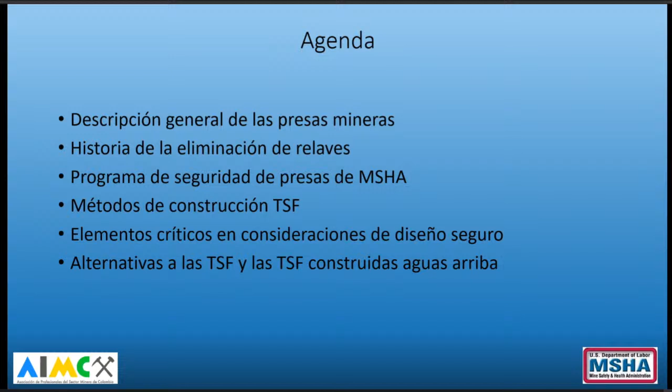How are dams used at mining operations? ¿Cómo son nuestras presas utilizadas en operaciones mineras? The primary purposes are for the disposal of waste from mining and processing. El principal aspecto importante es la eliminación de los desechos de operaciones mineras y de su procesamiento. The storage or processing of plant water. También es muy importante el tener la consideración respectiva con el almacenamiento y el procesamiento de agua en las colas. Sedimentation control and flood control. Control de sedimentación y control de inundaciones.

Next. The primary differences between a conventional water storage dam and a tailings dam.

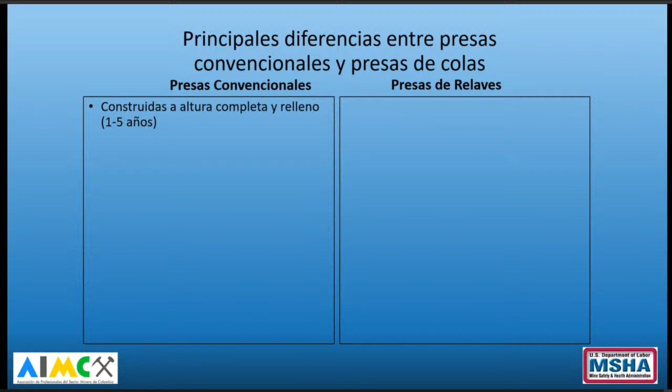Las principales diferencias entre las presas convencionales y las presas de colas son: a conventional dam is constructed to its full height and filled typically within 1 to 5 years. Las presas convencionales son construidas a su altura completa y son rellenadas en un lapso de entre 1 a 5 años.

A conventional dam is constructed of select materials chosen for specific properties. Las presas convencionales son construidas a partir de materiales selectos elegidos de acuerdo a sus propiedades específicas. A conventional dam will use less risky construction methods. Una presa convencional va a utilizar métodos de construcción menos riesgosos.

The design and operation of the dam rarely changes during the life of the dam. Su diseño y operación rara vez cambia durante la vida de la presa.

A conventional water storage dam is considered an asset. Y las presas convencionales de agua son consideradas un activo.

A conventional dam is breached at the end of its useful life. Y las presas convencionales al final de su vida útil son desmanteladas o se les genera un orificio para que puedan continuar el flujo normal de agua.

Conversely, a tailings dam is constructed incrementally over the life of the mine, which may be 20 or more years. A diferencia de las presas convencionales, las presas de relave son construidas de manera progresiva y a lo largo de la mina, que puede ser más de 20 años.

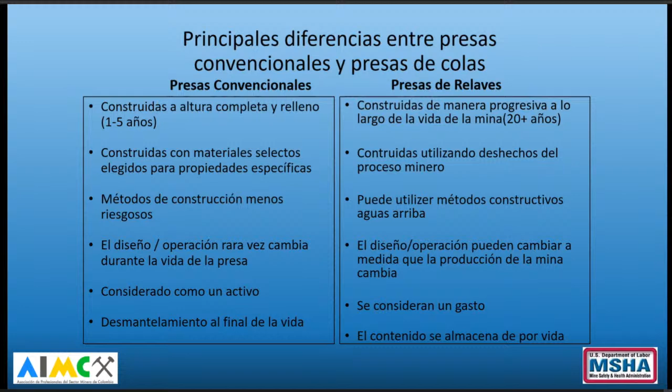The contents of a tailings dam must be stored for eternity, typically. Y el contenido de las presas de relaves tiene que estar almacenado por el resto de la vida, generalmente.

Similarities between a conventional dam and a tailings dam. Como hay diferencias, también hay similitudes y entre estas se destacan.

They are designed for similar conditions for flood routing, stability, and seepage. Son diseñadas para condiciones similares como inundaciones, estabilidad o infiltraciones.

They will be monitored to assess their performance. Son monitoreadas para evaluar el desempeño.

They're inspected regularly to identify deficiencies. Son inspeccionadas de forma regular para identificar deficiencias.

And the consequences of failure are identical. Y las consecuencias de fallas son idénticas.

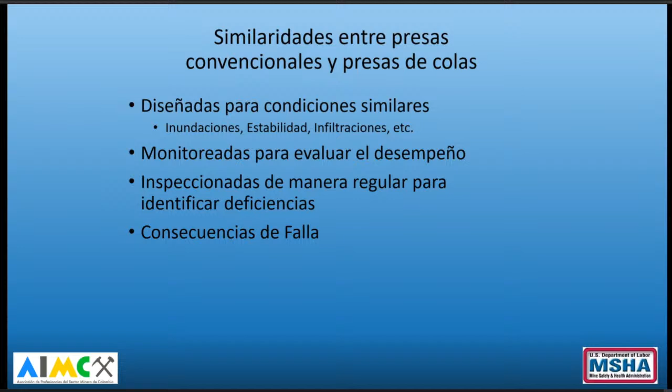A brief history of MSHA regulations related to dam safety. Vamos a hablar ahorita un poco sobre la historia de la reglamentación de MSHA acerca de la seguridad de minas, de presas.

In 1966, our Metal and Non-Metallic Mine Safety Act. En 1966 fue desarrollado este act que ayuda con el tema de metales y no metálicos en minería. It was one simple statement that if failure would create a hazard, it shall be of substantial construction and inspected at regular intervals. Y era muy simple este act y lo que buscaba era que si alguna presa generara un peligro, debería ser construida teniendo en cuenta todos los aspectos técnicos e inspeccionada en intervalos regulares.

In 1969, our Federal Coal Mine Health and Safety Act was passed. Y en 1969 fue pasado en el Congreso el Acta Federal de Seguridad y Salud en Minas de Carbón. Similar wording, except there was a requirement for weekly inspections. Y fue muy parecida a la anterior reglamentación, sino que se le incluyó reportes semanales cuando habrían inspecciones muy pobres.

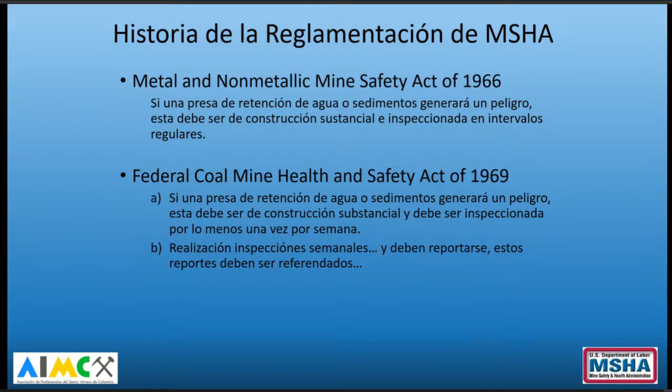Initially, waste would be dumped straight into a river or a stream. Inicialmente, los desechos del carbón eran tirados a los ríos o quebradas. When that was stopped, mine operators would start to build impounding structures. Cuando eso paró, los operadores mineros empezaron a construir lagos.

And they weren't always of good engineering, design, or quality. Y muchas veces no contaban con las características ingenieriles de buena calidad.

In 1972, February, a famous dam failure at Buffalo Creek occurred. Y debido a eso, en 1972, el 26 de febrero de 1972, hubo una falla en la presa de desechos de carbón de Buffalo Creek. The photo on the left shows the pre-failure condition of the embankment. La foto en la izquierda muestra el talud antes de la falla.

And the right shows the aftermath, the post-failure and the destruction. Y en las fotos de la derecha muestran lo que pasó después y la destrucción. Resulting in 125 fatalities and 4,000 homeless. Resultando en más de 125 vidas perdidas y más de 4,000 personas sin hogar.

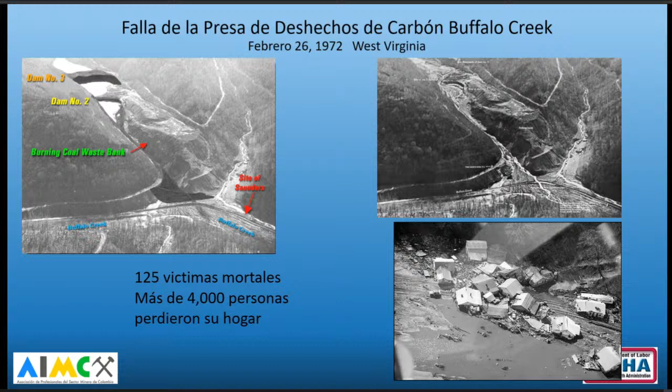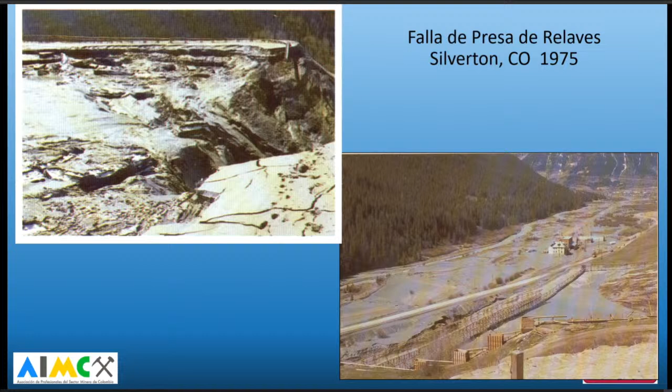A 1990 failure in San Juan, Puerto Rico that covered a toll road - one of the tailings dam failures that year completely covered a toll road.

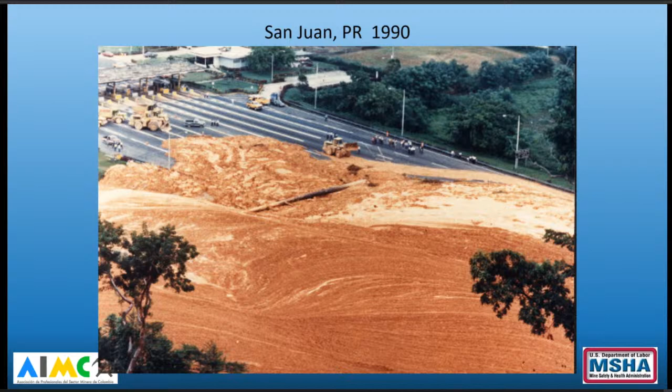Continuing with the history: in 1972, because of dam failures, the U.S. Congress enacted the National Dam Inspection Act. The Army Corps of Engineers would inspect all non-federal dams.

A national inventory of dams was created, and the federal government started to write the federal guidelines for dam safety.

At that time, MESA, which was before MSHA, published guidance on inspection and design of dams for coal mines and metal/non-metal mines.

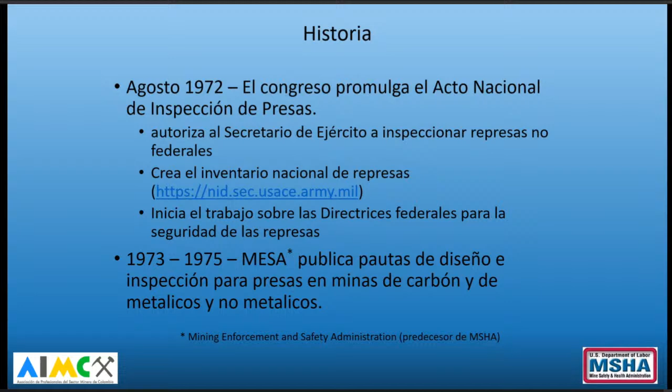In 1975, there was a big change in our coal regulations. We now required a design plan by a professional engineer.

The plans have to be approved by MSHA.

It established criteria for people conducting inspections of the dams.

Hazardous conditions had to be corrected promptly.

And it requires an annual certification by a professional engineer that the dam is constructed according to the design plan, meeting the required standards.

And from 1975 to the present, we continue to publish guidance on the design, operation, and inspection of coal dams.

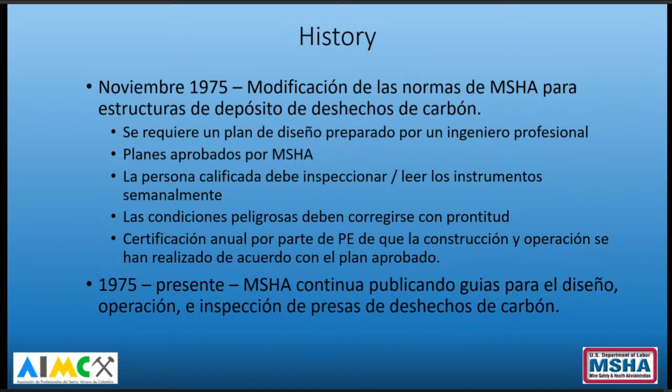In 1975, MSHA published a design manual, and it was updated in 2009.

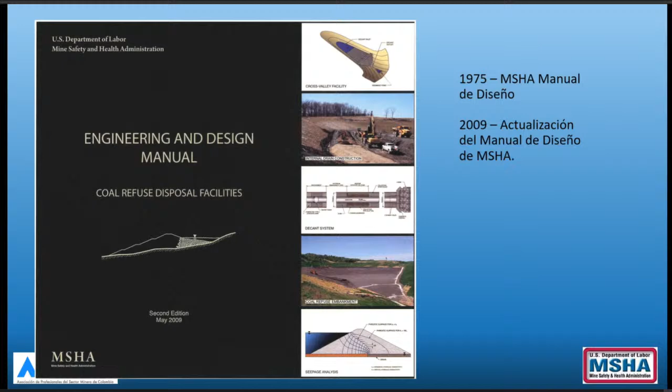These are some examples of the type of construction we see after our regulation was improved, after 1975.

Material is placed according to engineering specifications.

An example of construction of a modern day coal impoundment.

A view of the downstream face of one of our coal impoundments in West Virginia.

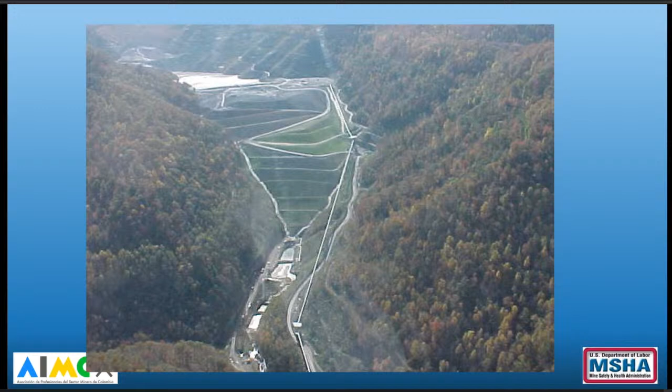On our metal non-metal side, we've tried three times to pass regulations.

But the regulation today remains the same as it was in 1966.

Many of the U.S. states do have regulations for tailings dams.

A couple of pictures of a construction of metal and non-metal dams.

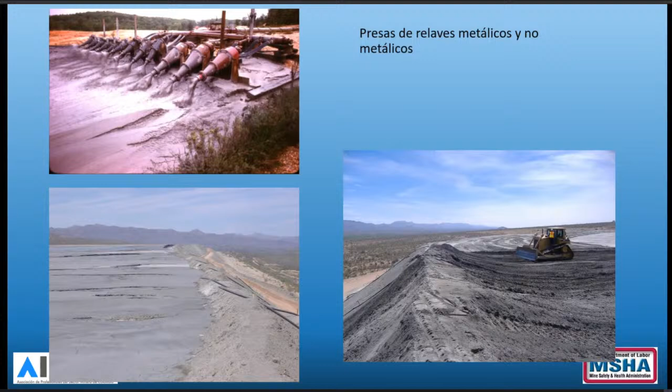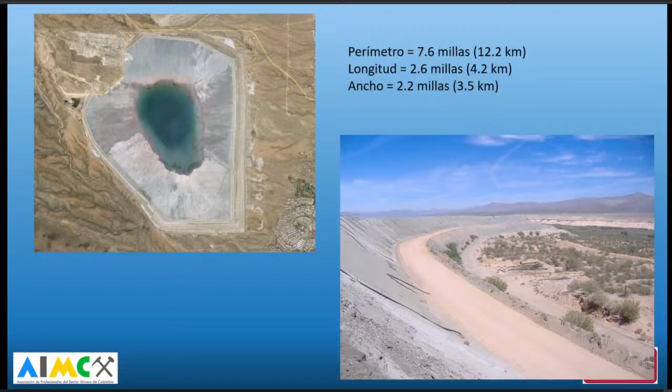The left-hand photo is one of our larger dams in Arizona, and you can see the dimensions.

In January 2021, MSHA published an updated dam inspection and plan review handbook for our inspectors. Information on our dam safety program and references are available on our dam safety webpage.

A summary of our dam safety program.

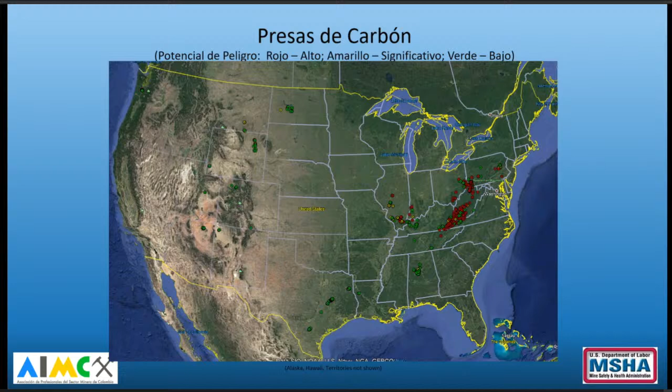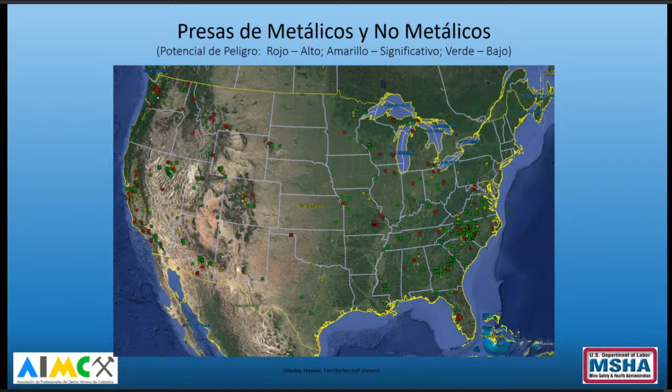Next, I would just like to close by saying a word about the recently published Global Industry Standard on Tailings Management.

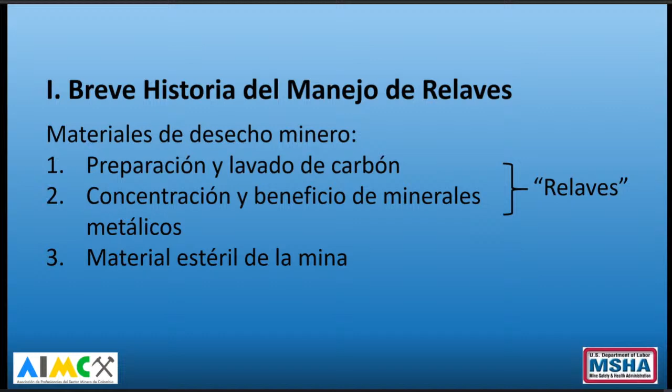In the eastern United States, coal preparation is a very important part of processing coal to remove the impure rock materials from the coal.

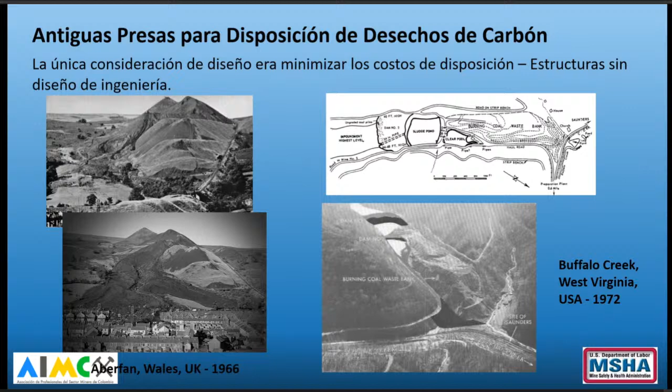Next. Okay, of course, coal.

Coal preparation today is very efficient at removing all the size fractions of coal from the waste.

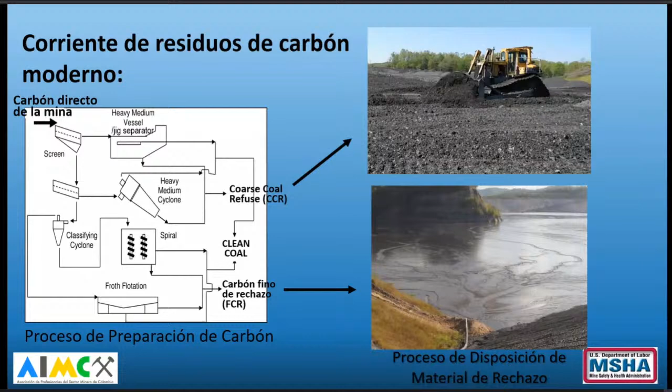Of course, with metals tailings, there was similarly very little engineering to dispose of it. In some cases, no impoundment at all. One case involved disposing tailings directly into Lake Superior in the state of Minnesota. In other cases, they were designed to standards no engineer would design any structure for.

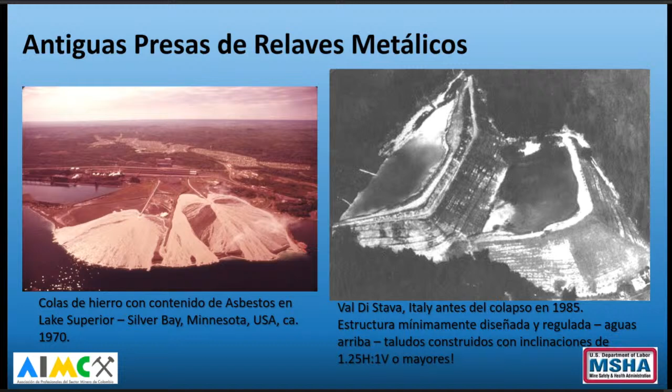Next slide. Stan discussed already the coal and the regulations, and they've been successful.

The slide he showed, this is the Upper Big Branch refuse impoundment. Stan showed an earlier slide, and it's been safely operated.

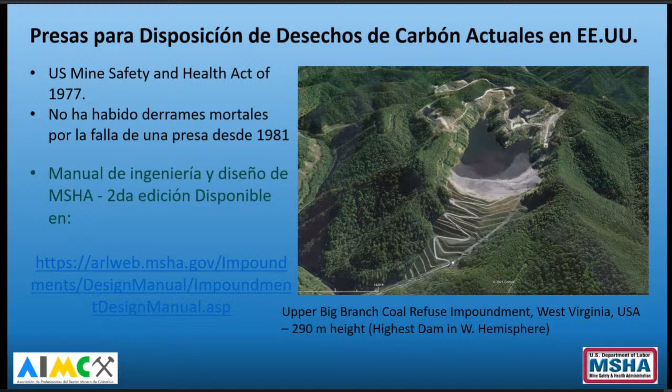Okay, next slide. Stan also discussed, of course, metals impoundments.

The standards around the world vary widely. In the United States, there is very little regulation.

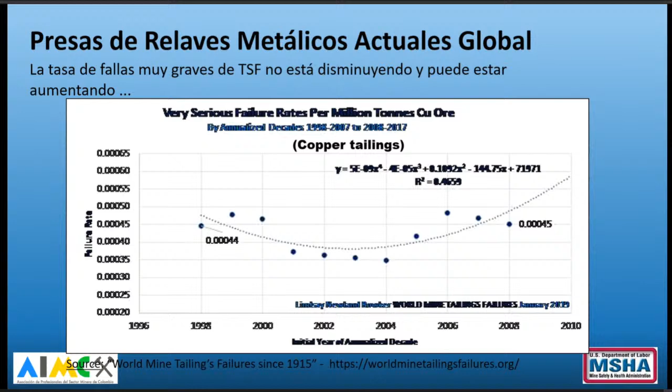Next. Recently, Dr. Williams, who was one of the investigators for the Brumadinho tailings disaster, placed this large red area in this chart of probability of failure and lives lost, indicating very high risks, certainly unacceptable.

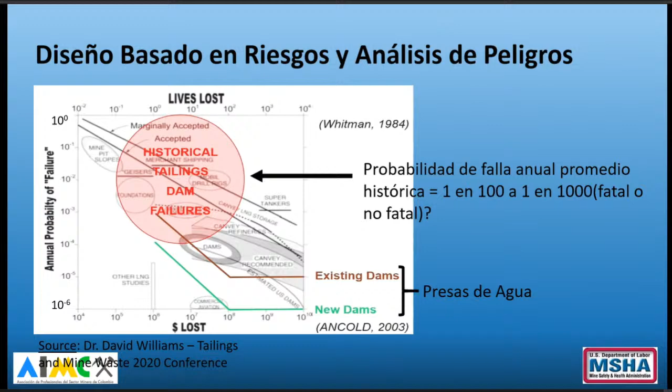Next. In evaluating the risk, it starts with evaluating how much material will be released and how far will the material travel if a failure occurs.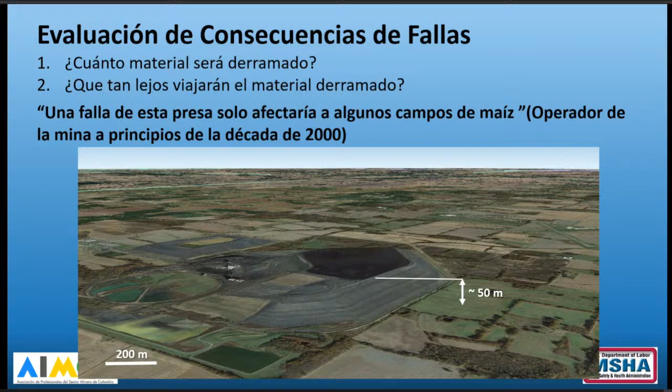Okay, next. This is one example of the quantities released. As you can see, it was approximately 60% released and flowed into actually an adjacent body of water.

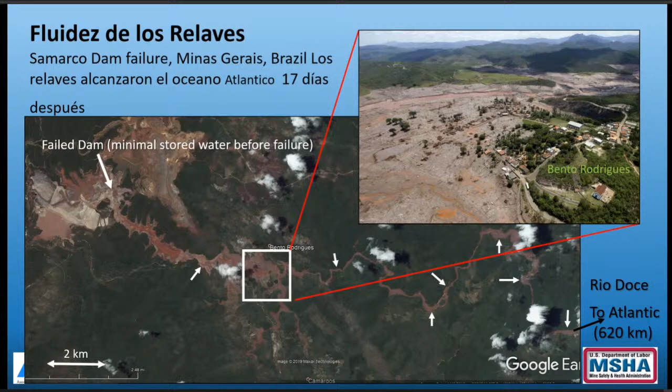Next. So the key point of a hazard analysis is to do a detailed analysis of the dam should it be breached.

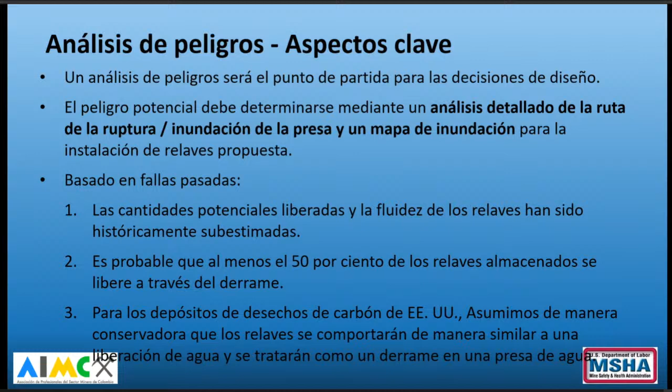Okay, next. This is the classification system. Should be noted, what's generally adopted internationally is 5 different levels of classification of the consequences of failure. In the United States, we use 3. However, basically the highest level is achieved as soon as there's any chance of loss of life.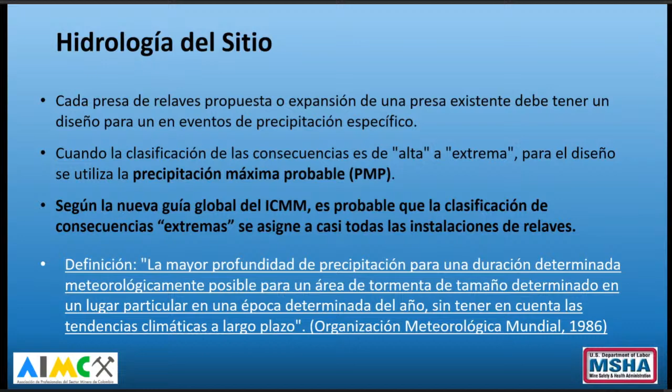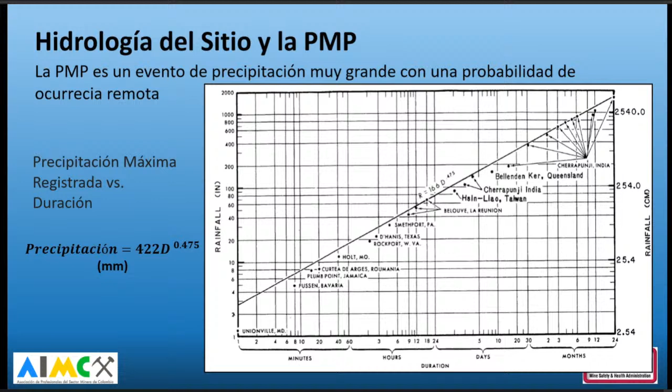The design measures to accommodate the storm will include either providing enough height of the crest above the normal pool to store the storm, or a large enough spillway to pass the storm without storage needed.

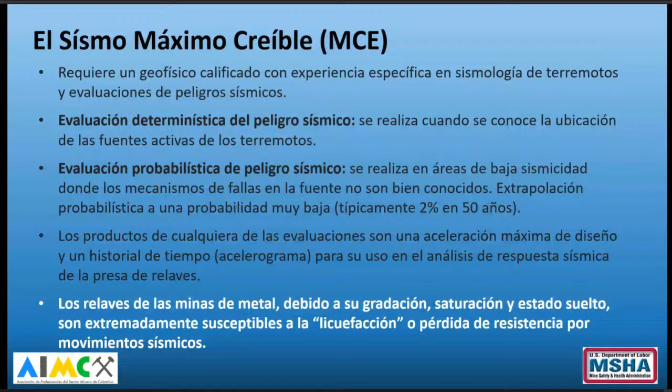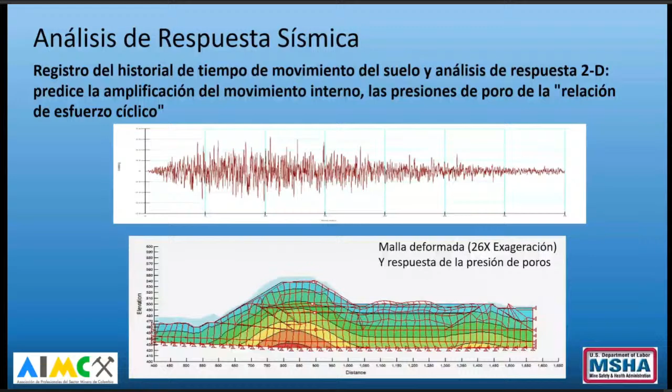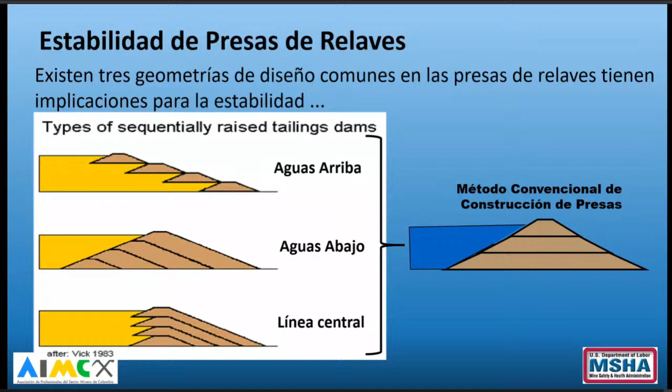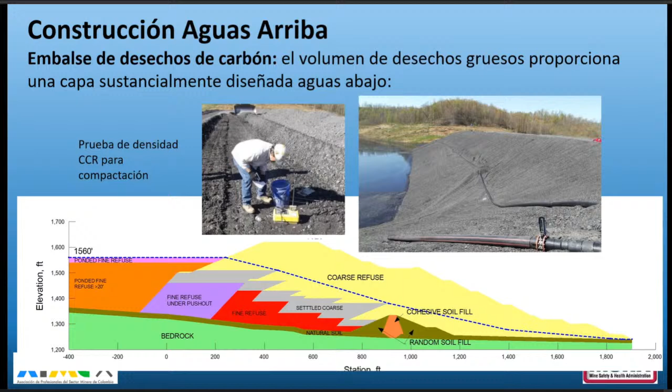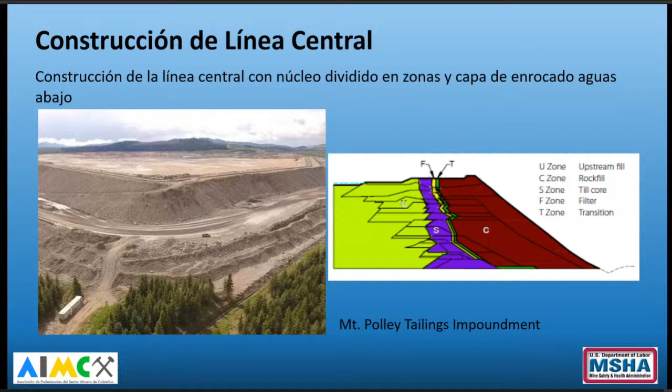Centerline construction can also be constructed if there's sufficient sand.

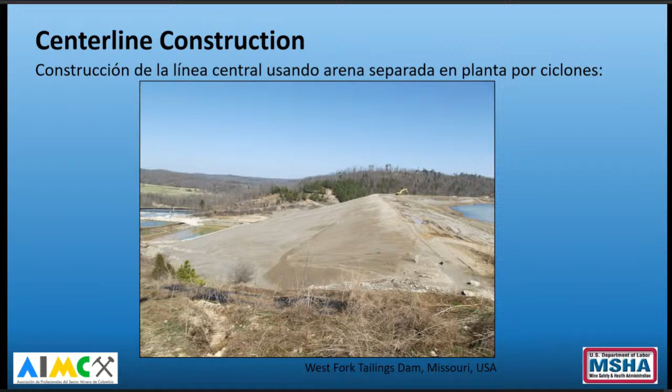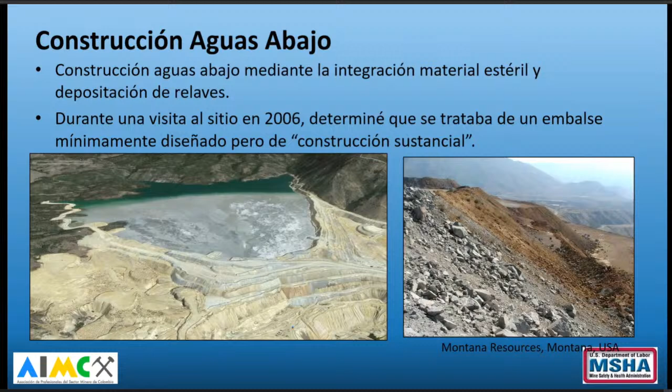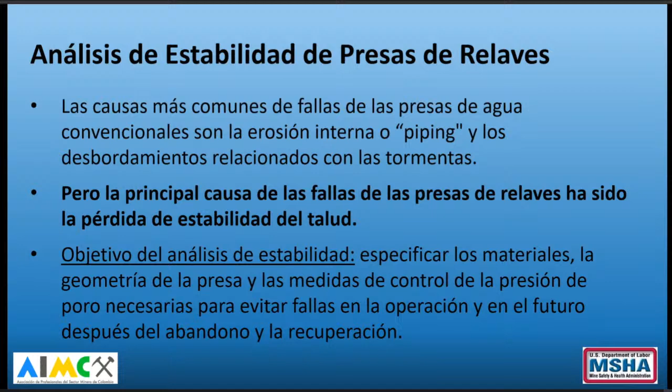Of course, like all engineering analysis, you look at the driving forces destabilizing it, and that would be the weight of the material, the rate of loading, and loads from seismic events.

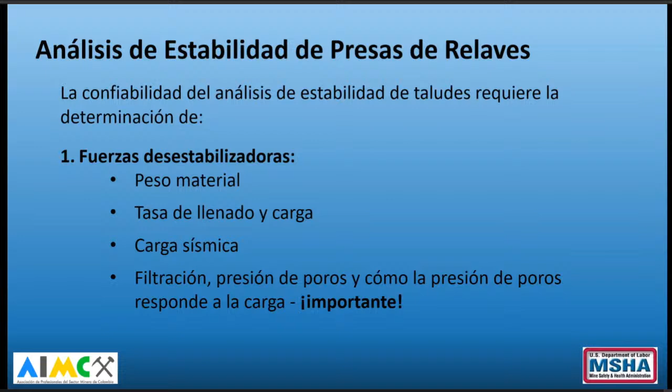The foundation has to be investigated through drilling, sampling, and testing.

The tailings also have to be characterized, which can be difficult because the mine may not be in operation yet, so there are no tailings produced that can be tested. In this case, the engineer has to investigate similar operations already in use and be very conservative.

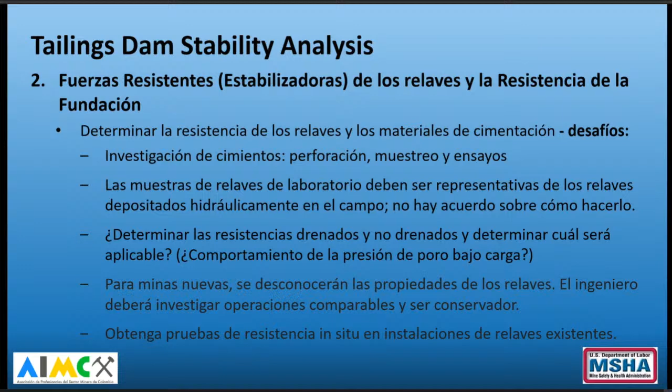The foundation is important, but engineers often overlook it, and this has resulted in failures. This was the Mount Polley failure.

A similar failure for similar reasons happened at Aznalcóllar in Spain in '98, due to poor characterization of the foundation material.

Characterizing the tailings starts with the gradation of the tailings. These are some typical gradations of the whole tailings and the fine fraction, according to their content of fines, coarse material, or silts.

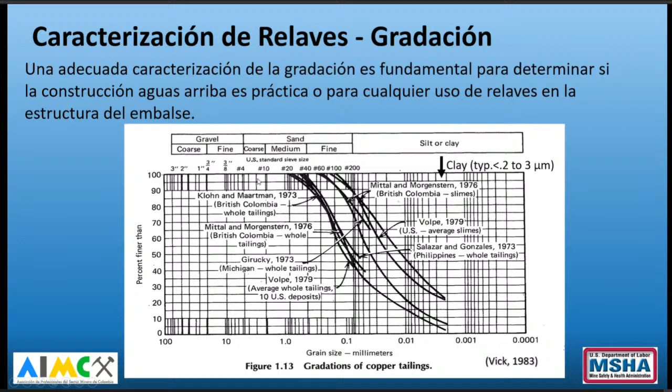These are gradations of tailings obtained from cyclone separation. As you can see, the cyclone sand can still be fine sand, and it cannot correct for an insufficient or overly fine sand fraction, which remains sand.

The sand used for filters in water dams, in contrast, contains much more coarse material, such as ASTM C33 sand. Sands used for these dams vary a lot, tending to be coarser, more similar to the ASTM C33 sand shown in the image.

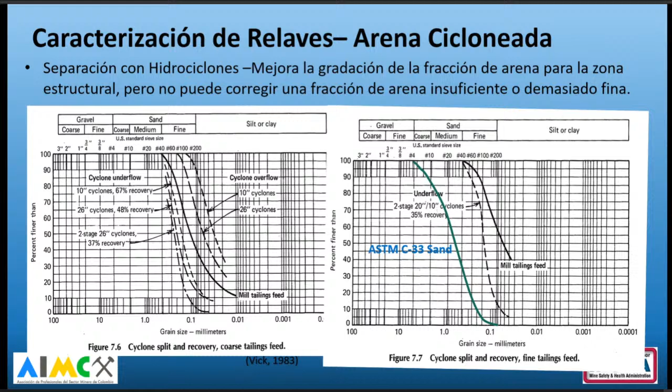In the case of coal, we have two very different materials. The coarse coal refuse contains gravel-sized material.

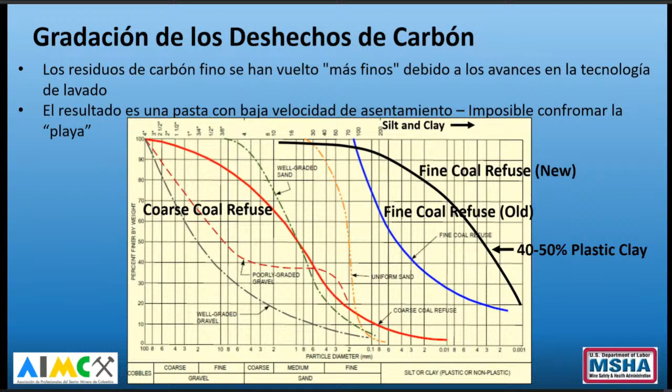The fine coal refuse used to typically contain significant amounts of sand, but with newer coal preparation it now contains large amounts of clay and very little sand.

The two important points regarding gradation are that a continuous tailings beach is required to form a foundation and structural zone for upstream-constructed tailings dams, which relates to upstream construction and the amount of silt and fine sand.

If there is less than 40 to 60% sand, upstream construction may not be possible or safe.

Tailings are also predominantly silt and fine sand, which is the material least understood in the soil mechanics field.

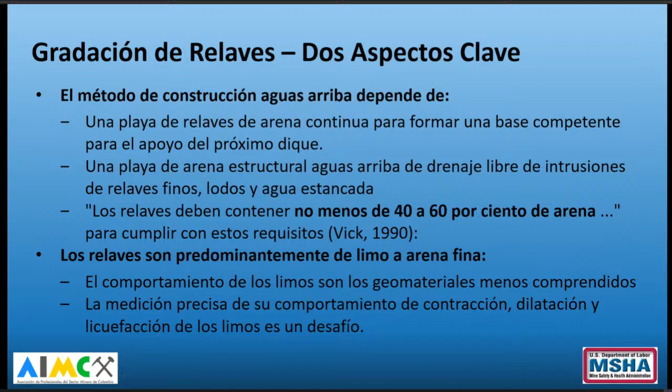Pore water pressure is very important in determining the strength and behavior of tailings, which comes from three causes. The important one is the pore pressure generated as a result of shearing strains, which can be positive or negative. Although in tailings, it's almost always going to be positive due to the loose condition.

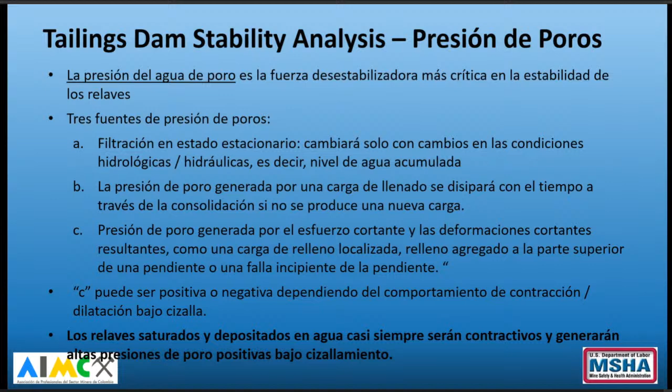Next. What we can kind of call the first law of soil mechanics is that the effective stress in a soil is equal to the total stress applied minus the pore pressure. If the pore pressure is high enough, you have no effective stress, and the strength can go to zero.

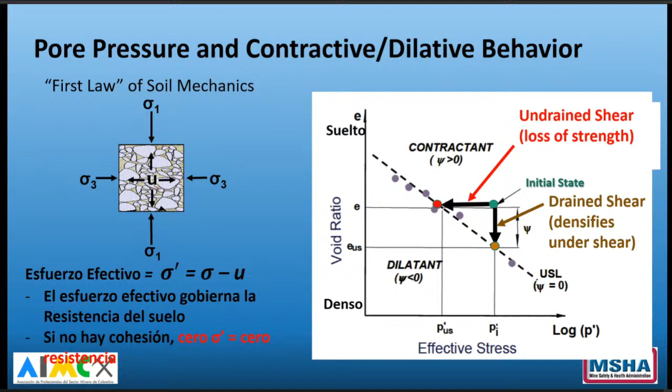Next. So there's two strengths that need to be determined, a drained strength and an undrained strength.

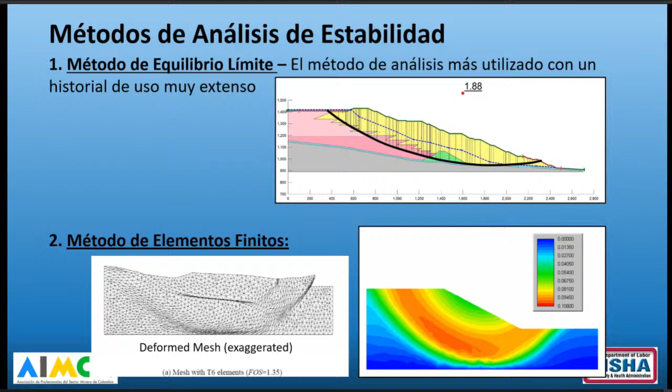Now, stability is analyzed for various cases of loading for the facility. The first is called steady state seepage, el estado estable de la filtración a largo plazo. This case is just the facility with no changes occurring to pool levels, seepage, or any other loading. This type of analysis has very little applicability to tailings dams because they are always being built and the loadings are always changing, ya que las presas de relaves siempre están en constante cargas y construcción.

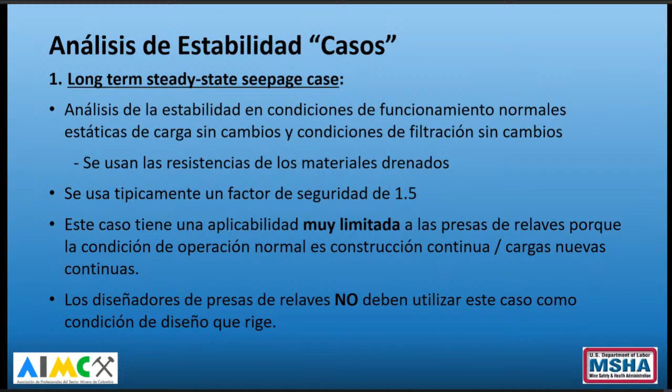The case that's most useful for tailings dams is the staged construction case, el caso número 2. In this case, you analyze increments of loading along with predictions of the pore pressures that are generated and dissipate, generando una resistencia a los relaves. This case is going to be the critical case for tailings facilities, el que gobierna los diseños. Typically, a lower factor of safety is used because the stability will only improve with time.

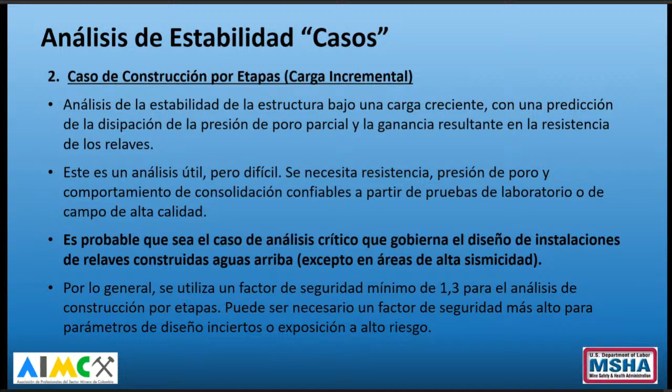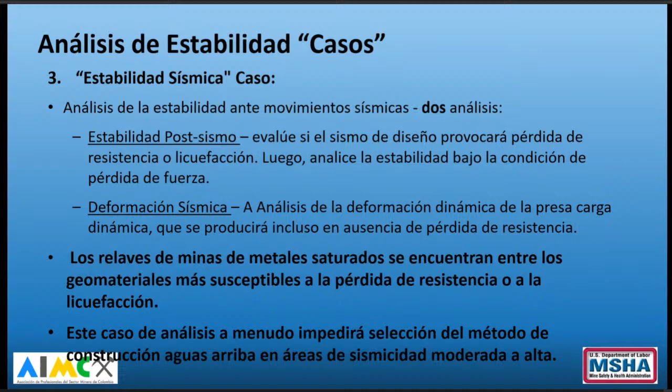Tailings materials containing clay are typically not considered to liquefy. However, they can lose strength.

In this example from a coal facility, we still had too low a factor of safety.

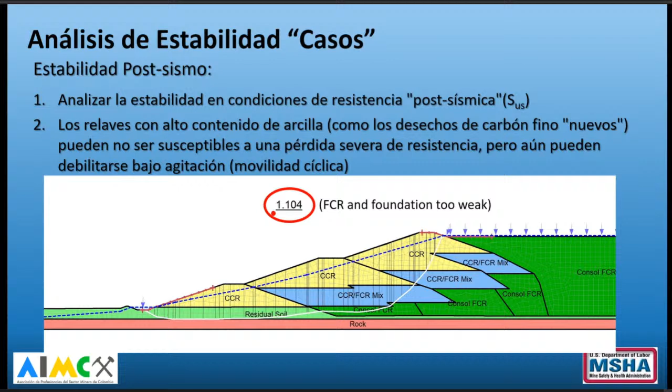The next is a seismic deformation analysis, which we would only perform if it passes a post-seismic stability analysis.

The most common method is the Newmark type method, and it involves stability analyses under the accelerations that the shaking subjects it to. With a computer, you could perform thousands of stability analyses. Here we see a model in which different deformations are generated according to the seismic events modeled.

When the seismic accelerations drive the safety factor below 1, deformation occurs and it accumulates as shown on the graph on the right. But in this case, the deformations are only 4 centimeters, which is satisfactory.

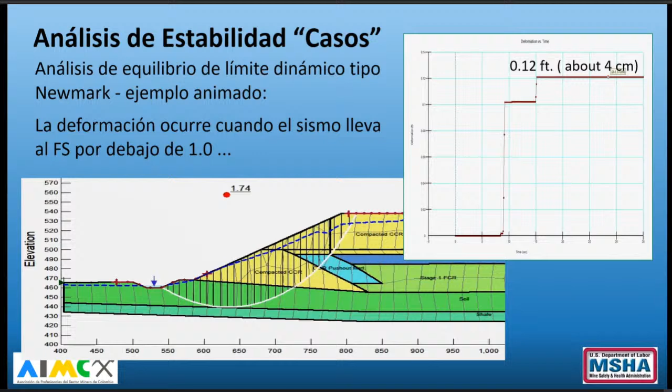All stability analyses have limitations to them. Limit equilibrium analysis looks like a deterministic analysis, but it can be viewed in a probabilistic way within the analysis.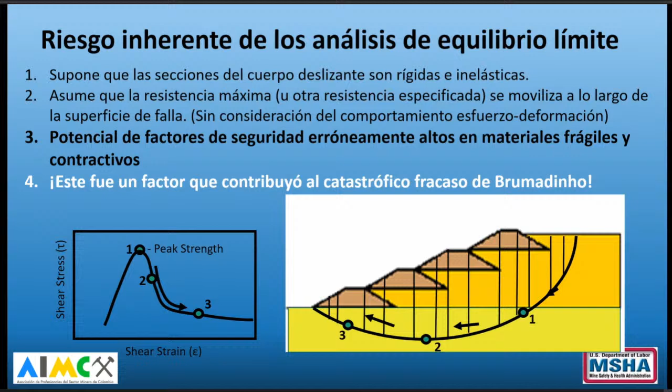So as a final topic, we'll talk about alternatives.

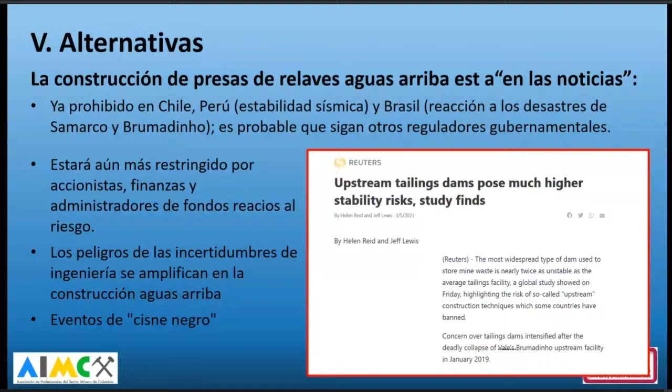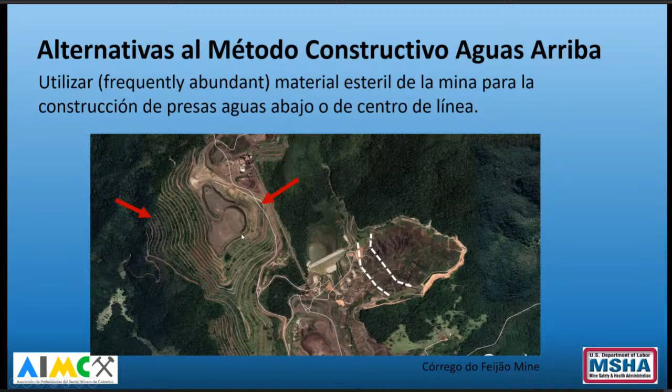The other alternative is to build a conventional dam, like a water dam, for storage of the tailings.

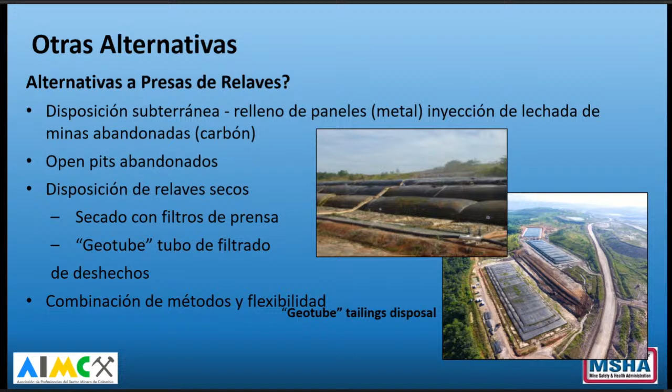And so as some final comments, the times are changing very fast, and governments and private sector people are looking at tailings facilities very closely.

And it's very different from the past, where a failure of a tailings facility did not have much in the way of consequences. And that has certainly changed, and that's a very welcome change.

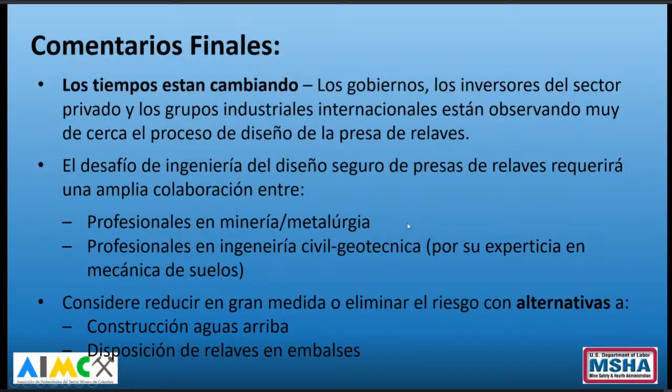Should I answer that? Well, I'll say something first and then you can. Certainly, water in a tailings dam is one of the biggest problems.

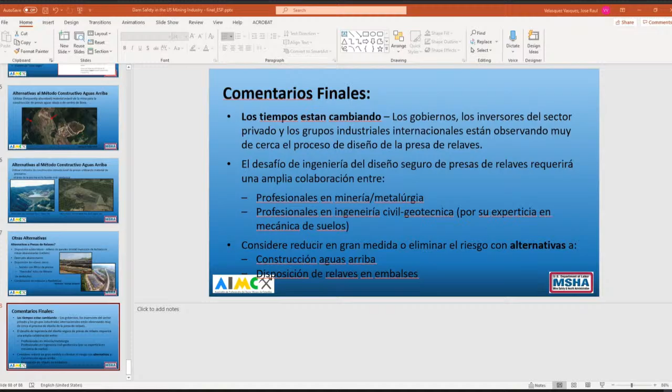But proper defensive measures may be able to be designed into the dam.